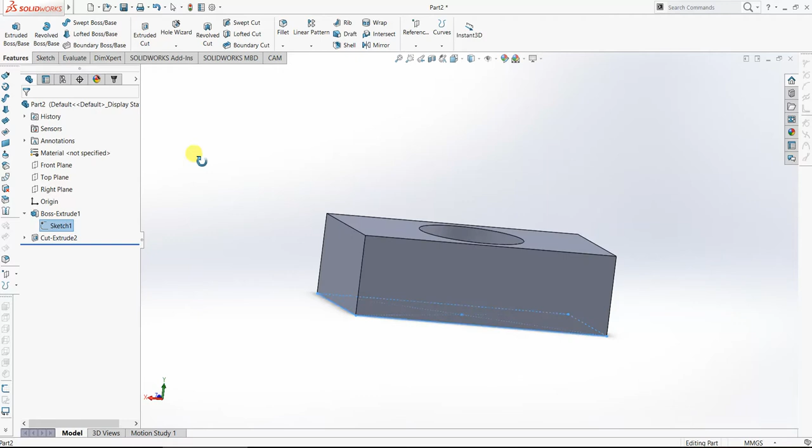One thing that's going to help us do this is a feature of SolidWorks. Whenever you hit the down arrow, you see whatever sketch the feature, in this case the extrude, came from. So if you click on sketch 1, it'll highlight that original sketch that we made of the rectangle.

And if you hit the down arrow and hit sketch 3 next, it'll do the same. We could make another sketch on this face, but what's going to be easiest is if we go back in and edit sketch 3. So we're going to right click and hit edit sketch.

And here we have it, our original circle, the original face with the 40 millimeter circle. Okay, so now what we're going to do is sketch a couple lines. One thing that's important to do, and that's going to help us a lot, is the construction line feature.

SolidWorks isn't going to make any features off of this line. It's not going to extrude anything or cut anything, but they can be super useful when you're trying to dimension other parts correctly. So first we're going to do a center line going across the width of the part for construction, and this will be useful later.

Hit escape to get out of the line menu, and we're going to hit center line for construction. We're going to start on the outer edge of the rectangle and work in until we hit the diameter of the circle. SolidWorks is really useful in that it gives you these guide points, which can be super helpful if you're trying to figure out where things connect.

So for example, I don't have to guess where the diameter of the circle is. I can just press this button and it automatically finds it. Now we have our center line, the center point between the outer edge of the prism and the circle.

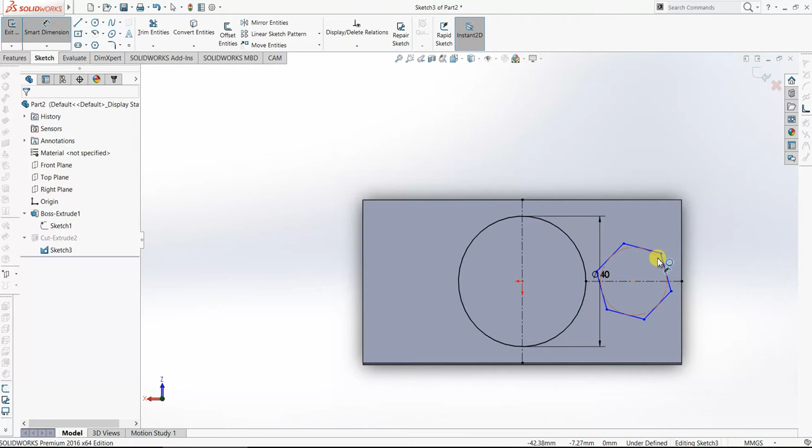Once again, to define it, we're going to hit Smart Dimension. We're going to define it off of the inner circle. So we want 20 millimeters here.

Now what I would really like is for this side right here to be parallel to the outer side of the part. You can do that by adding a relation. So hit down here, add relation, then click this line, the one that we want to be parallel to the outer face.

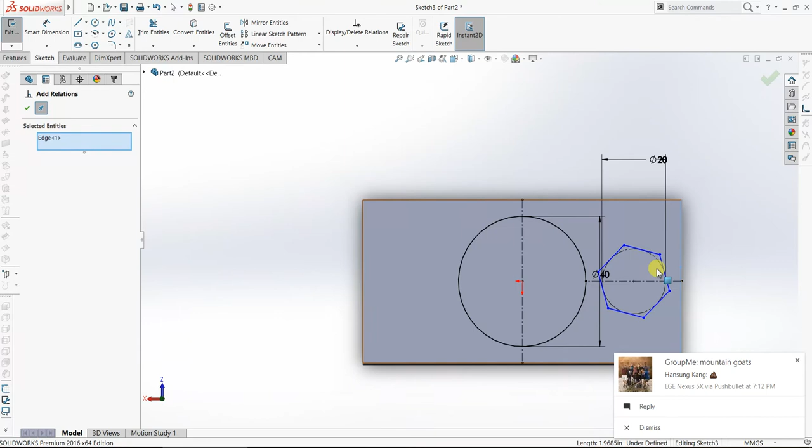And then we'll go ahead and click the outer face. Let's try this again. I'm going to click here, and to make sure we're getting the right part, we'll click here. Okay, so now we're going to add the parallel relation.

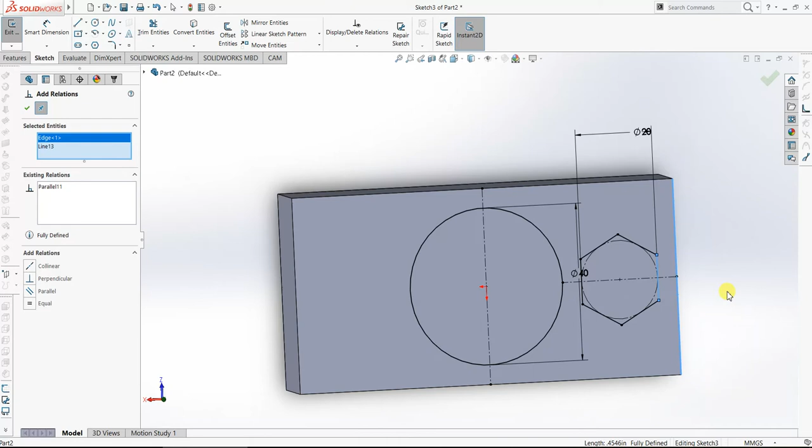Now the hexagon has turned black, which means it's fully defined and it's parallel. So that is exactly what we want.

Now, before we exit our sketch to extrude cut, we're going to do one more thing. We're going to hit mirror entities. So if we want a hexagon on either side, we could start from scratch and do the same thing on the other side, or we could use the mirror tool, which is extremely useful if you're going to create a bunch of the same parts on one plane.

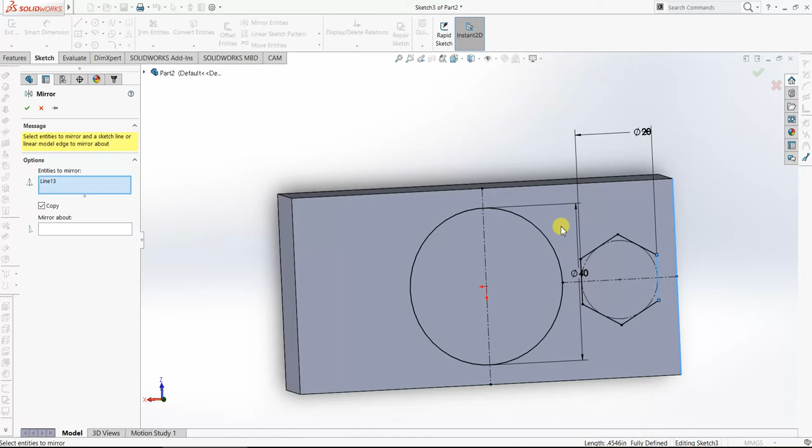So for entities to mirror, we're going to go ahead and click all 6 sides of our hexagon. And for mirror about, we're going to click this construction center line we did earlier. Now you'll see in yellow, the hexagon on the other side shows up. So hit the green check. Perfect, okay, we're going to exit the sketch.

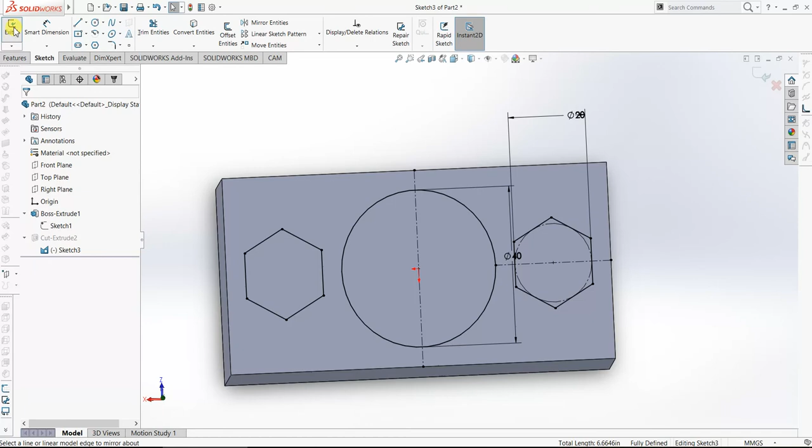And because it didn't show up on our cut extrude, we can fix that. We're going to go to edit feature and click... this isn't working.